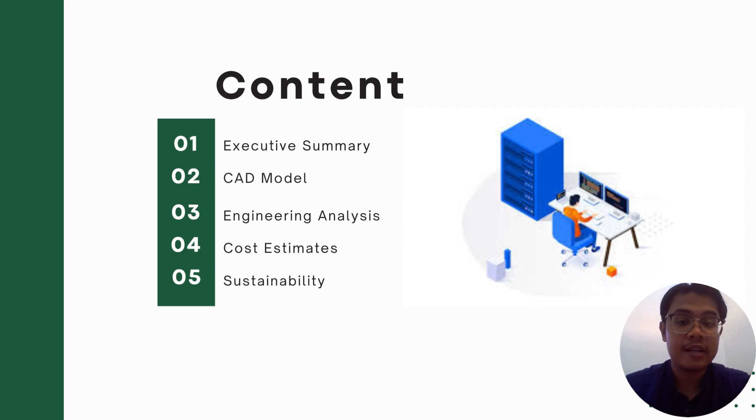For the executive summary, we did our site visit at Terra Tech Venture Sdn Bhd, a company that repairs and operates electrical components such as television, laptop, refrigerator, and washing machine.

Based on our observation, the workers have difficulty finding spare parts for certain models because the storage room was too messy. So we held an interview session with the owner and workers at the company, and also did a brainstorming session among the group members to solve the problem.

That's why we came up with the idea of a smart rack using an IoT system, where the worker can easily access the smart rack through their mobile phone or other device.

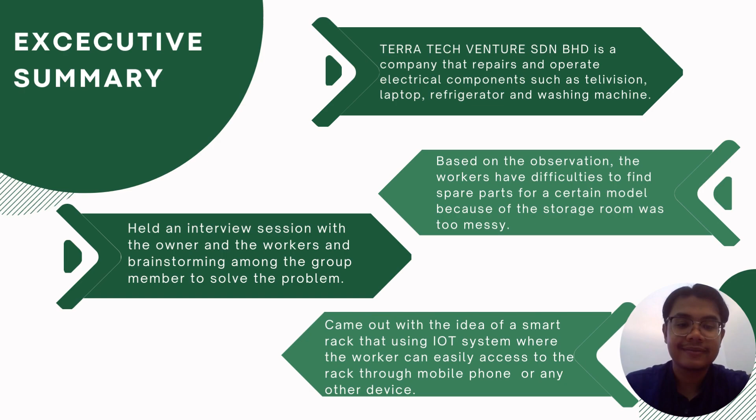For example, the first section we only keep Sony spare parts, the second section we keep Samsung spare parts only, and the last section we keep Toshiba spare parts.

For each drawer, we put at least 10 rack dividers to keep the components in a straight and tight position. We also designed a door handle to make it easy for the user to open the drawer, and put wheels at the bottom of the drawer so it is portable and can easily be moved around.

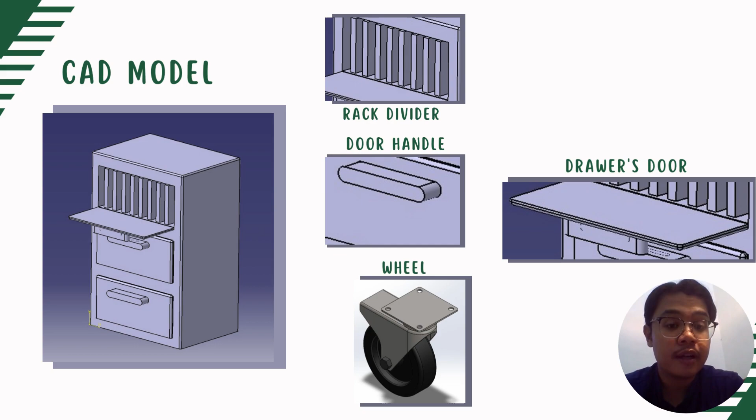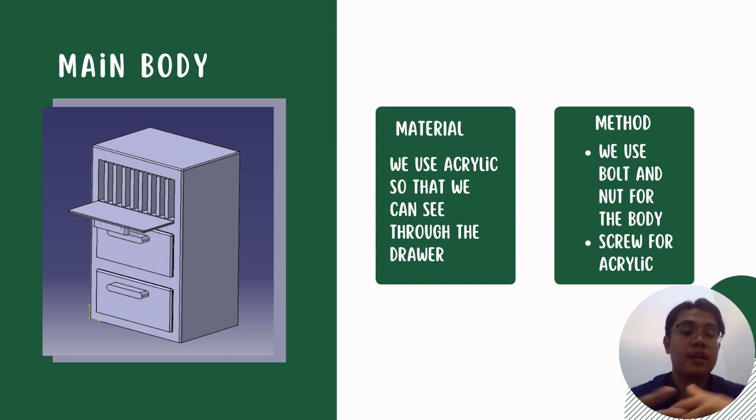For the main body, we use aluminum profile for the frame body, and then acrylic to cover the aluminum profile. Why do we use acrylic? We use acrylic so that we can see through the drawer and notice how many spare parts are left.

The method we use to attach the acrylic and aluminum profile is bolt and nuts for the body, which is the aluminum profile. To attach the aluminum profile to make the frame body, we use bolt and nuts, and to attach the acrylic to the aluminum profile, we use screw and nuts.

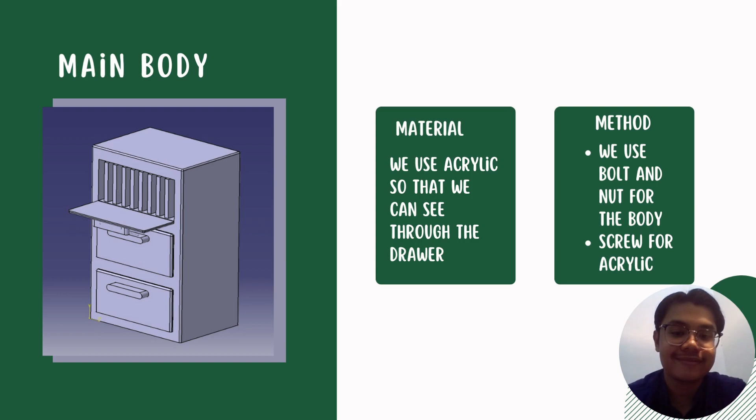Next, for the rack divider, the material we use is PVC sheets or plywood. Why this material? Because it can easily be found in the market and is also cheap, so we can reduce our cost for the material. The method we use to attach the rack divider is the mortise method, because it is strong and reliable.

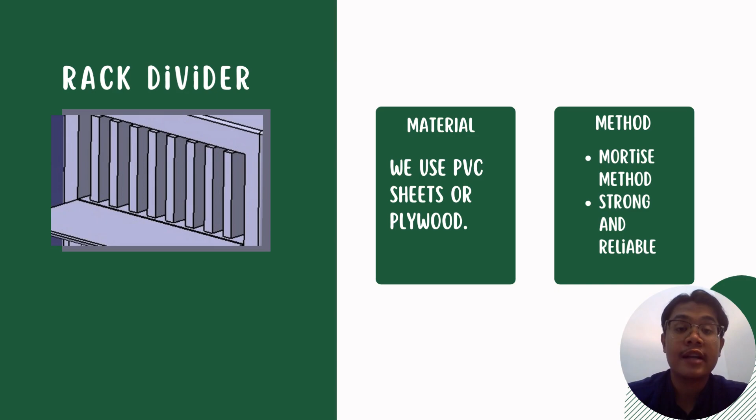Next, we have the door handle. For this part, the material we use is ABS plastic, and the method to attach the door handle to the drawer's door is screw and nuts.

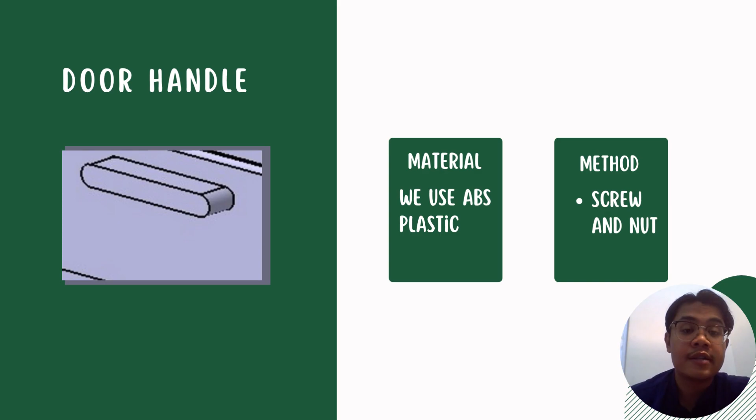For the drawer's door, we use a material called acrylic. We use this material because it is lightweight. Acrylic sheets are considerably lighter than traditional door materials like wood or metal. This makes acrylic doors easier to handle, install, and operate.

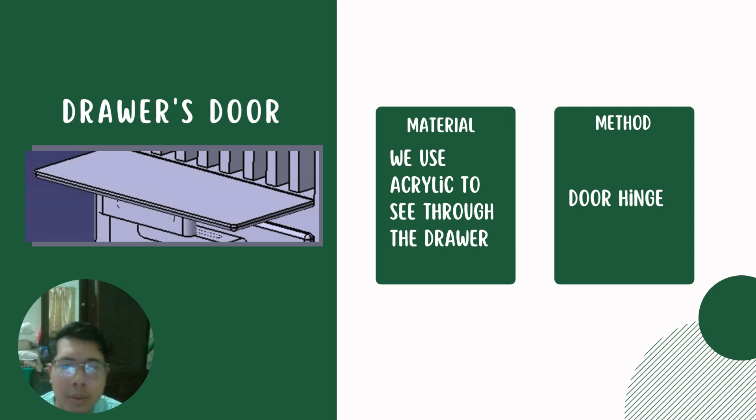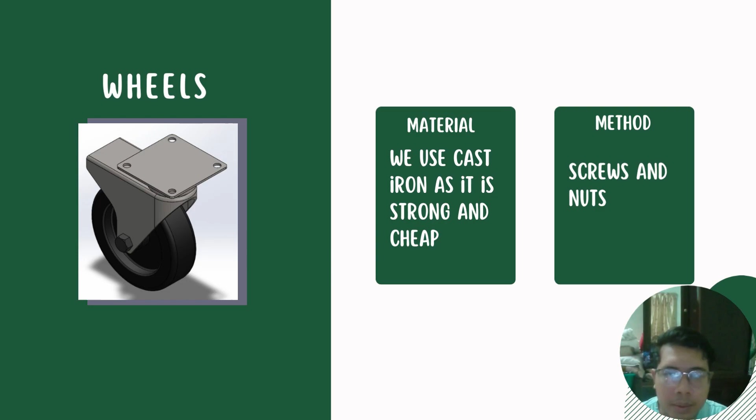Now I will explain the ergonomic analysis. For this, we are using Rapid Upper Limb Assessment, known as RULA analysis. It is an ergonomic assessment tool used to evaluate and analyze the risk factors associated with the upper body's posture and movements during work tasks. The RULA assessment was conducted through CATIA.

Based on the figure and the RULA score results, we achieved 3 for the final score. Although it is not a good result, we can see through the RULA score table that there is no red color shown. If we analyze the details of the table, we can see that the most affected parts of the body are the upper arm, wrist, and arm.

As the figure shows, the posture of the upper arm is quite stretched upward in an awkward position. Besides, we also notice that the wrist and arm are stretched forward too much, making it an awkward position for the person. This may cause fatigue and overstretched muscles to the user, leading to less productivity.

After discussion among the group members, we may need to change the height of the product, and we can also suggest to the worker to place the product on a lower height shelf.

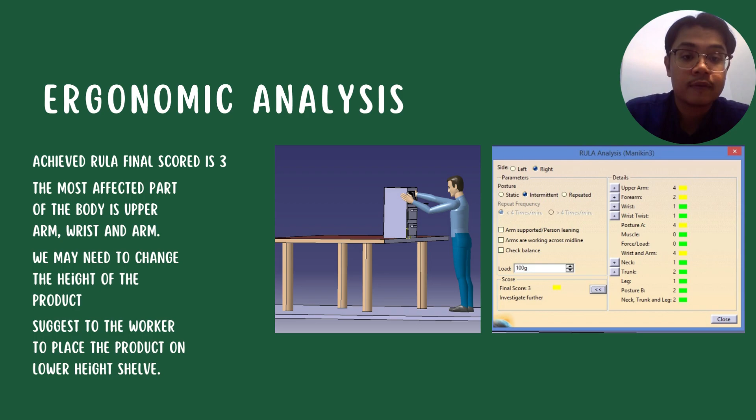I'm Dan Jiaqi. Today I will present the cost analysis for the project design manufacturing product, smart organizer.

There are three types of cost in the cost analysis: material cost, fixed cost, and variable cost. In this slide, I will present the material cost.

Material cost is the expense associated with the actual material used to create a specific good or deliver a particular service. In the material cost table, the first column lists all the materials needed to produce a smart organizer, such as acrylic, aluminum profile, ABS plastic, plywood, PVC sheet, wood board, caster wheel, hinge spring, and light indicator.

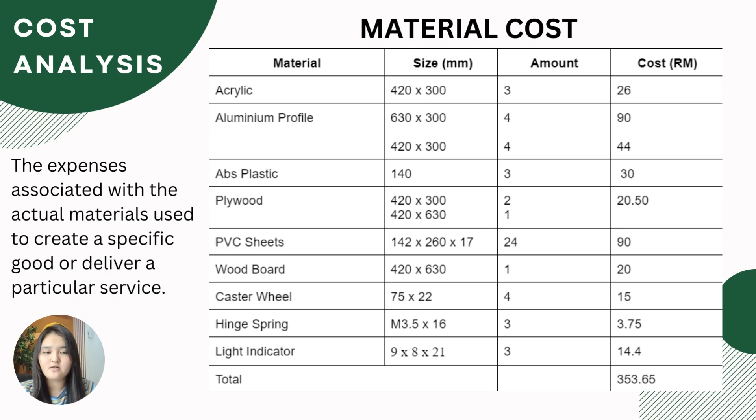The second column shows the material size, the third column shows the amount for each material, and the last column shows the cost for each material. In the last row of the table, we see the total material cost for producing a smart organizer, which is 353 ringgit 65 cents.

Next, the second cost in the cost analysis is the fixed cost. Fixed cost is the cost that remains the same regardless of how much a business produces, such as land, property tax, insurance, and depreciation, which are unrelated to a company's specific business operations.

The third cost in the cost analysis is the variable cost. Variable costs are any expenses that vary according to how much a business produces and sells. As a result, variable costs rise with increasing production and diminish with falling production. Examples of variable costs are material cost, labor cost, utility price, and commission.

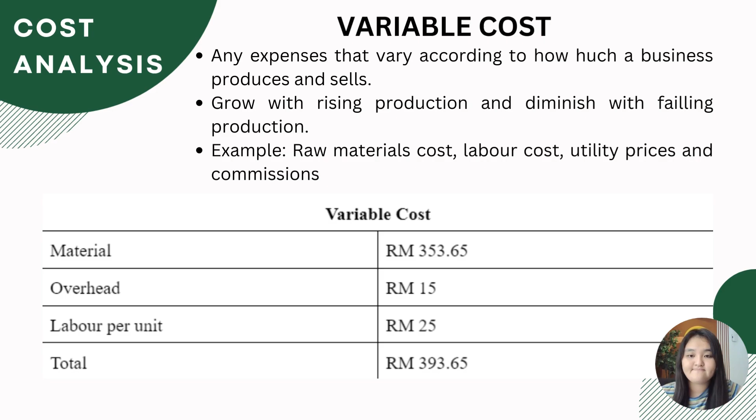Break-even analysis is the financial computation that compares the cost of starting a new firm, service, or product to the unit sale price to calculate the break-even point. The break-even point indicates the units that need to be sold to cover costs, such as fixed costs and variable costs.

We know the raw material cost is RM 353.65 from the previous slide, and the profit we take for this case is 30%. So we take the raw material cost of RM 353.65 and multiply it by the profit percentage, giving us RM 118.10.

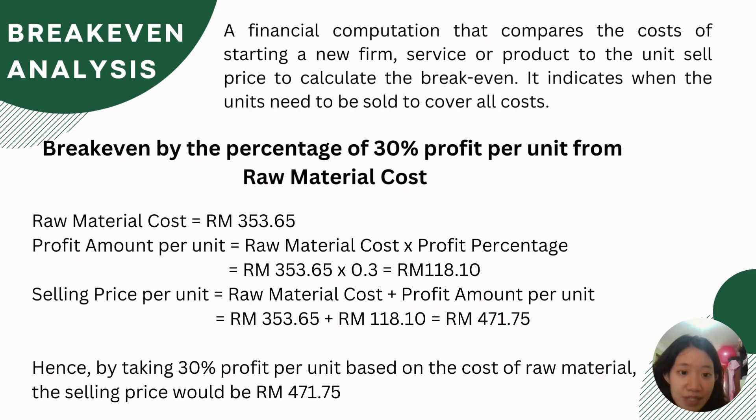To get the selling price, we take the raw material cost plus the profit amount per unit: RM 353.65 plus RM 118.10, giving a total of RM 471.75. This RM 471.75 is the selling price for our product.

To calculate the break-even point, we take the fixed cost divided by the selling price minus variable cost, giving a total of 7 units. To calculate the break-even price, we take 7 units multiplied by the selling price, giving a total of RM3302.30. Referring to the break-even chart, the x-axis represents the unit and the y-axis represents the amount.

The blue line represents fixed cost, which remains the same throughout the units because it does not vary with output. The yellow line represents revenue, the gray one is total cost, and the red one is variable cost. At point number 7, we can see the revenue and total cost intersect, meaning that at this point the sales volume equals total cost.

After exceeding unit number 7, the revenue is now higher than total cost, meaning we are making a profit. If it is below 7 units, the revenue is lower than the total cost, so we are suffering a loss.

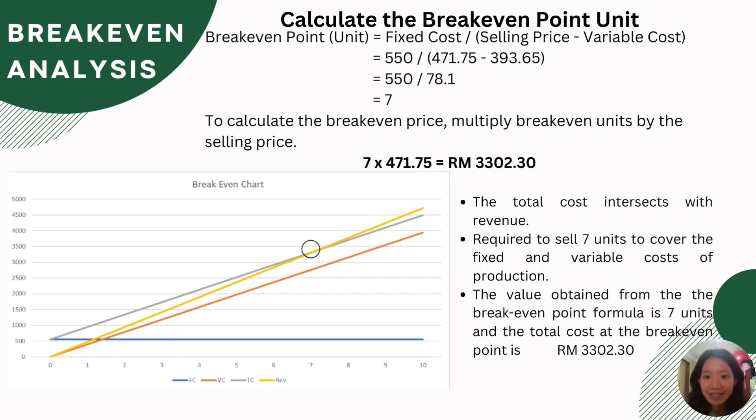To calculate the profit, we first need to calculate the total revenue. In this case, we assume the sales volume is 30 units. Total revenue is the selling price multiplied by the sales volume, giving a total of 14,152.50. To calculate the total cost, we take the fixed cost plus the variable cost multiplied by sales volume.

This gives a total cost of 12,359.50. Finally, to calculate the profit, we take the total revenue minus the total cost, giving 1,793. This is the amount we get if we were to sell 30 units.

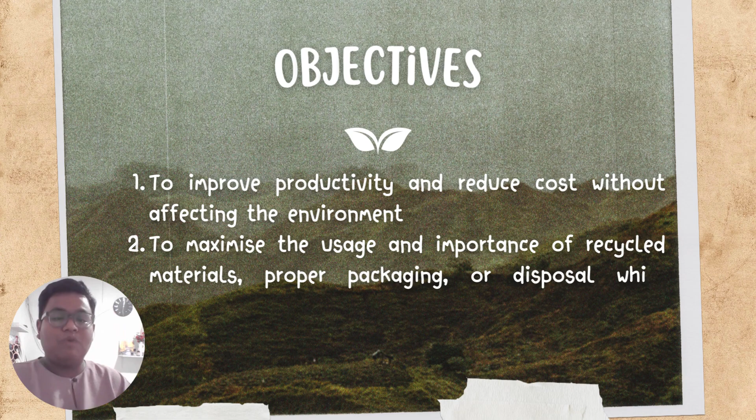The objective of our sustainability approach is to improve productivity and reduce costs without affecting the environment, to maximize the usage and importance of recycled materials, proper packaging, or disposal while minimizing environmental consequences.

Now I will talk about the design for environment guidelines, which contain five main aspects: material extraction, production, transportation/distribution and packaging, usage, and lastly, end of life.

We start with material extraction. Firstly, use environmentally friendly, ethically sourced, and minimally harmful materials, meaning lessen the amount of non-renewable resources that must be mined from the environment. Secondly, to extend the life of the smart rack organizer, choose recyclable and robust materials, meaning reduce the amount of production-related material waste. Thirdly, reduce the amount of material used, meaning boost recycling and simplify the sorting process.

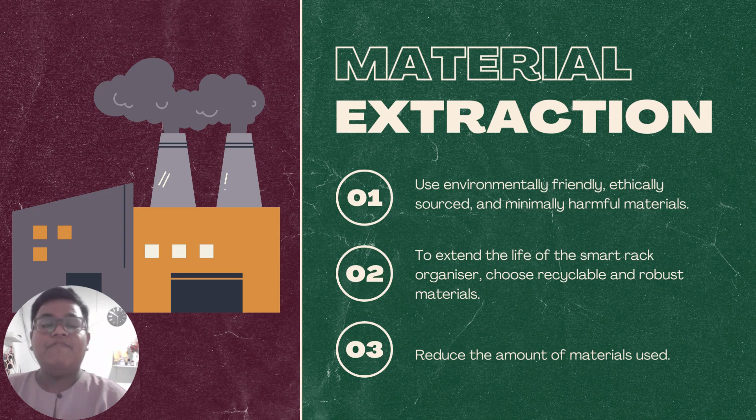Production. Firstly, optimize the manufacturing process to minimize energy consumption, water usage, and waste generation, meaning implement lean manufacturing principles to reduce inefficiency and optimize resource utilization. Secondly, avoid use of hazardous substances during the process, meaning substitute toxic materials with safer alternatives wherever possible, and comply with international regulations and standards to ensure the product is free from harmful substances.

Thirdly, establish a sustainable supply chain by engaging with suppliers that adhere to environmental standards and practices, meaning collaborate with suppliers to reduce the environmental impact of the manufacturing process. Fourth, implement waste minimization strategies such as recycling, reusing, and reducing waste generated during the production process, meaning optimize material usage and consider implementing a closed-loop system to recycle or repurpose manufacturing waste.

Lastly, ensure the health and safety of workers involved in the production process, meaning implement safety protocols, provide necessary protective equipment, and train employees on safe handling practices to create a safe working environment.

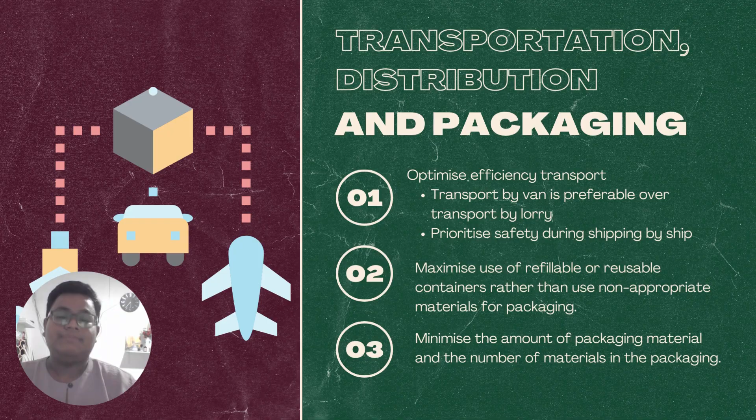Usage. Firstly, optimize energy usage during operation, meaning implement features such as power saving modes, automatic shutdown, and scheduling mechanisms to reduce energy waste when the rack is not in active use. Secondly, enable remote monitoring and control capability for the rack. This allows users to efficiently manage and monitor rack performance and optimize resource usage.

Thirdly, utilize real-time data analytic capability to gain insight into inventory management. This enables proactive decision making to optimize resource usage, prevent wastage, and reduce environmental impact. Lastly, implement advanced inventory management features in the smart rack. This helps optimize stock levels, reduce overstocking, and minimize waste due to expired or unused items. By accurately tracking inventory, companies can better plan and reduce unnecessary resource consumption.

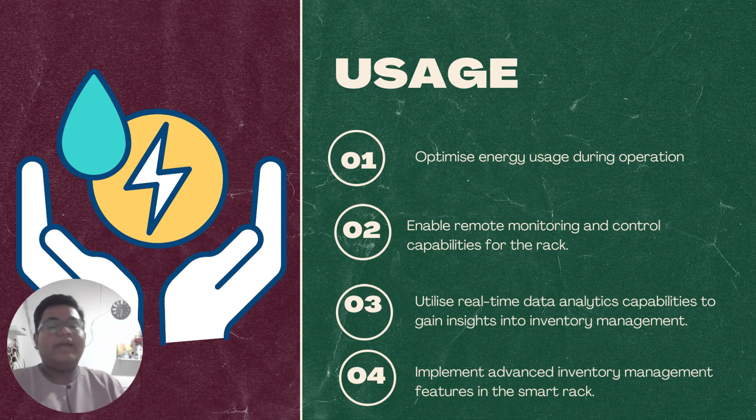End of life. Firstly, the smart organizer should be recycled or composted at the end of its life, meaning recycling or composting it will help conserve natural resources and reduce pollution. Secondly, the smart organizer should not be sent to a landfill, since sending it to a landfill will contribute to climate change and other environmental problems.

Lastly, the smart organizer should be disposed of in a way that minimizes environmental impact, since disposing of it responsibly is the right thing to do.

For recommendations on design for environment: choose environment friendly materials, giving preference to sustainable and low impact materials during the design process. Secondly, energy efficient product design, with designs and features that prioritize energy efficiency. Thirdly, user-friendly design, featuring elements that are intuitive, easy to use, and easy to maintain.

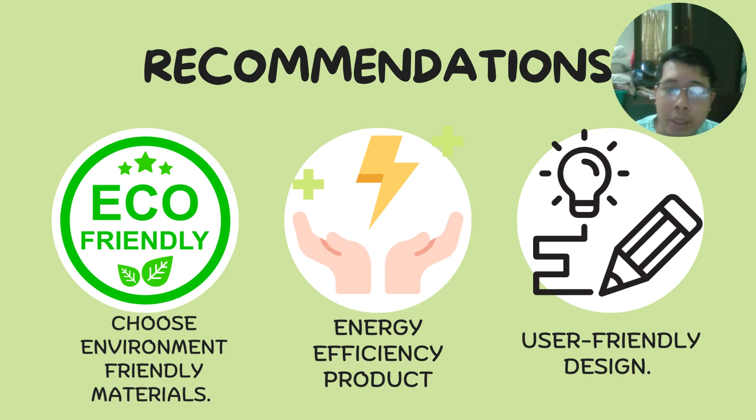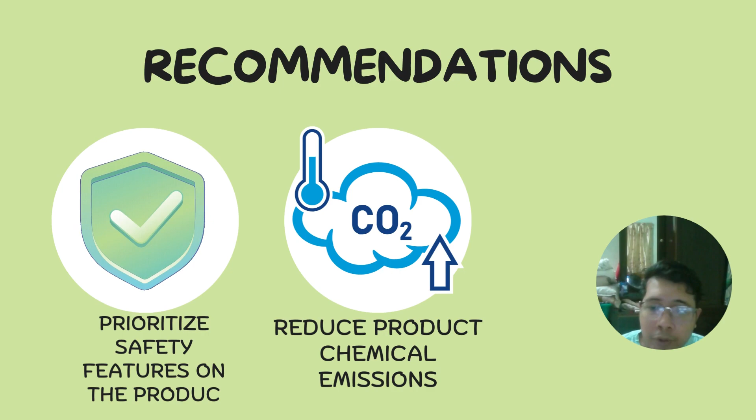Fourth, prioritize safety features on the products. With our features more or less mapped out and validated, we have to look at which ones are most important to work on first. Lastly, reduce product chemical emissions. One way to lower emissions is to focus on chemical processes by improving efficiency and switching to low carbon energy.